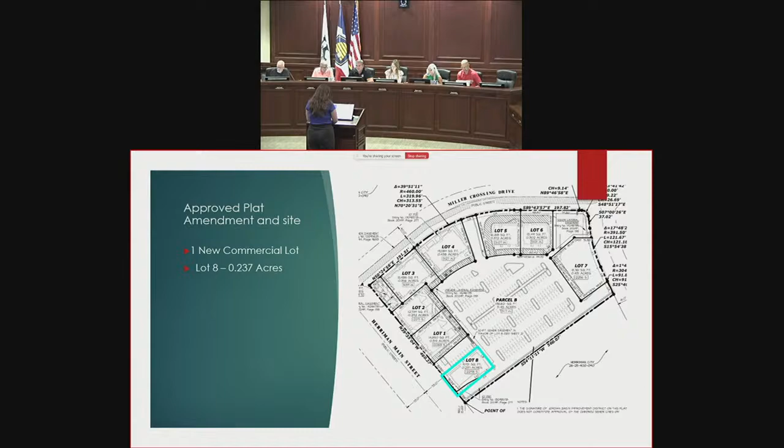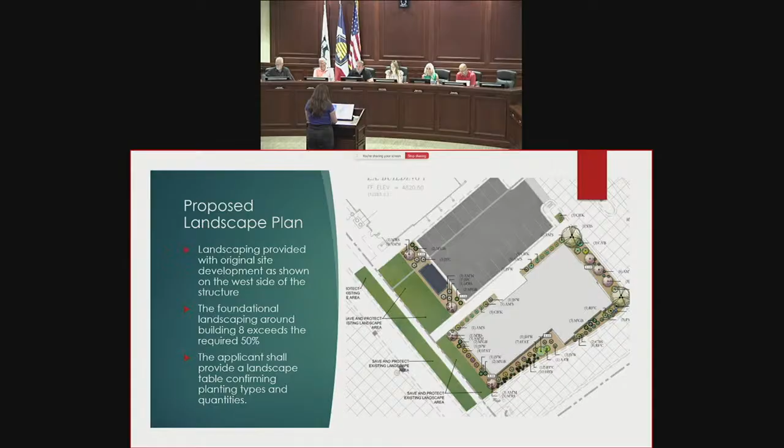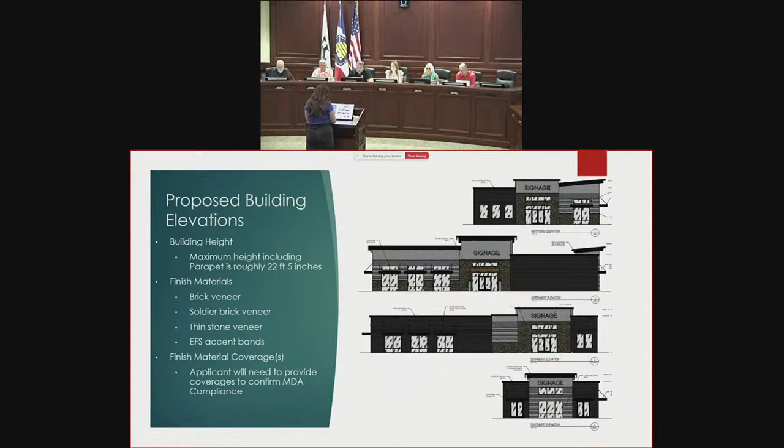These are the proposed elevations. As you can see, they're pretty similar to what else you would find in the Copperview Plaza. The maximum height shown on these drawings, including the parapets, is roughly 22 feet 5 inches. All of the materials mentioned are permitted to use within that MDA.

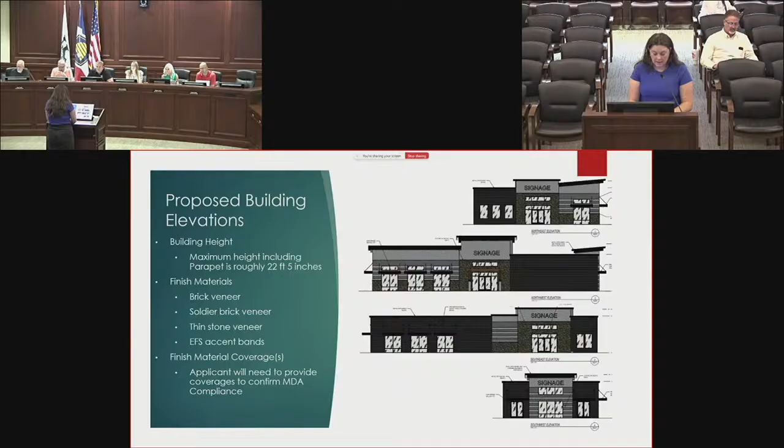Additionally, we will be asking the applicant for the final percentages. That was hard to say for some reason, the percentages. Removing the glazing and doors to make sure that they are meeting the 70-30 percentage that is mentioned within that MDA.

The parking for the area, that ratio was approved when the plat was amended as well as the MDA. There was a parking study done with that initial MDA. As this is still sort of that general retail recreation kind of area, it will require the same number of parking. So we are doing well there, and we're happy to see that there is a good amount of landscaping.

Finally, there are 7 conditions of approval. Please let me know if you have any questions about them.

Thank you. The applicant's not here, right? Okay. Do you have any questions for staff or a motion? No, this makes sense. It's what we expected. I'm ready to make a motion.

I move to approve item 4.1 with staff's 7 requirements. I'll second. A motion by Adam, a second by Heather. Andy? Yes. Daryl? Yes. Adam? Yes. Heather? Yes. And Preston? Yes. All right, that's approved.

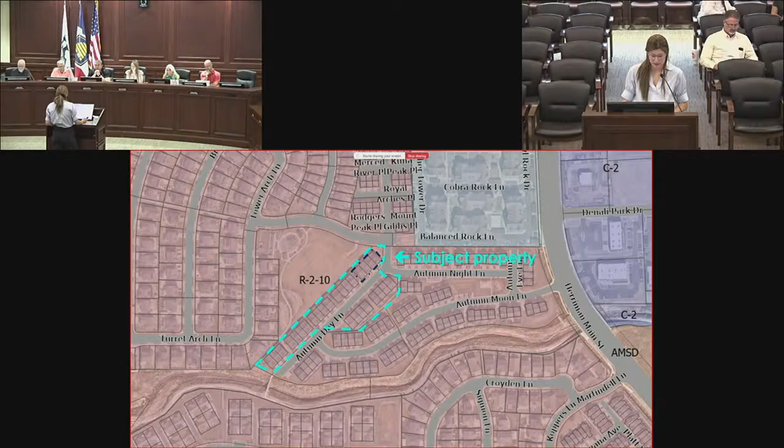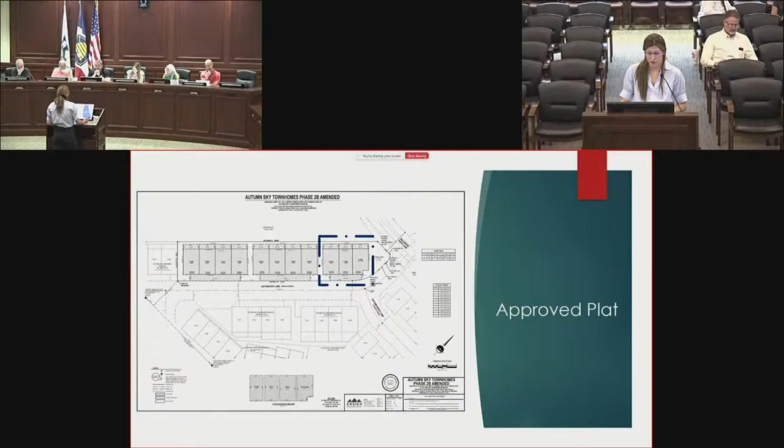Please note the navy dashed outline on the northern end of the property. This indicates and identifies building 26. And please also note that there are 4 units shown in this area. So the plat amendment previously approved reduces the units in building 26 from 4 units to 3 units as shown.

The original amended plat approval was actually given on June 6, 2024, with the following conditions of approval: that included receiving and agreeing to remaining corrections from city departments and to comply with all of the original conditions of preliminary subdivision approval, as well as to comply with all fire lane requirements per the UFA.

Just to keep in mind, a consideration of approval does come from section 10-5-15J of our adopted municipal code, addressing that with written request and good cause, the Planning Commission may grant up to a 1-year extension.

Staff recommends approval with the following condition: that all the existing conditions of approval for the original application request are completed, that they receive and agree to the remaining corrections from all of our city departments, including removing the abandoning drive approach from Half Dome Way, to also comply with all the fire lane requirements per the UFA, and if the subdivision plat is not recorded by June 6th of 2027, the preliminary approval will be deemed withdrawn.

Expire with no further force or effect. Let me know if you all have any questions.

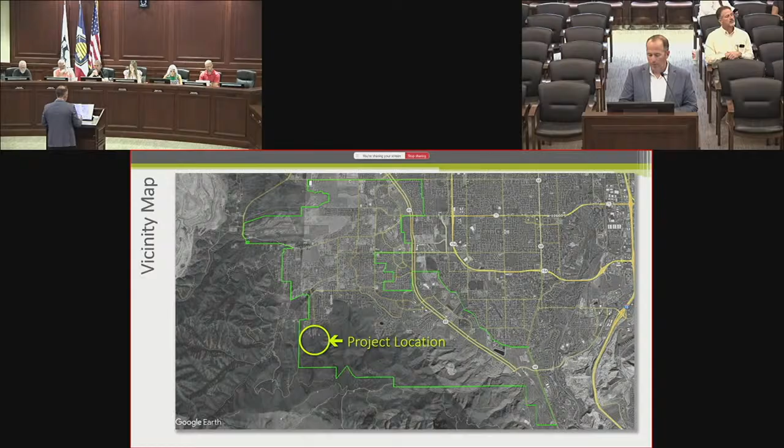Location of the Cove, for general public knowledge, is south end of town, kind of disconnected from most everything. This is the upper end of the Cove, and it's currently undeveloped on the far south end. This PUD was approved in 2004, with 423 total units approved at the time. Since 2004, they've built 201 units, leaving 222 remaining. We'll talk about that number again in a minute.

The key requirements were the approval granted by the Planning Commission at that time granted preliminary subdivision approval. All subdivisions since then have submitted an application, but they don't come to the Planning Commission. They're approved by staff unless the average grade of the lots or the site is over 20%. That was part of the original approval condition, so you'll see them if they're over 20%.

It also approved a concept plan and a PUD and a design booklet, which I attached in the packet. As you can imagine, in 2004, some of the requirements were quite a bit different for some of the items, so we'll go through that.

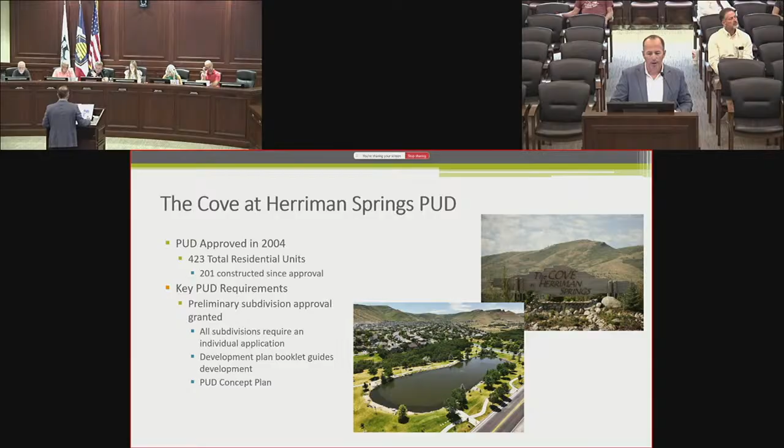The key requests are a modified cross-section for the roadway, some different lot configurations for the lot lines, some updated landscaping requirements, as I talked about in that design booklet. It required lush lawn and kind of extravagant landscaping, and we've kind of moved away from that with the drought and water-wise landscaping requirements. And then they're proposing some parking stalls near the open space to access the trails on the far south end of the project.

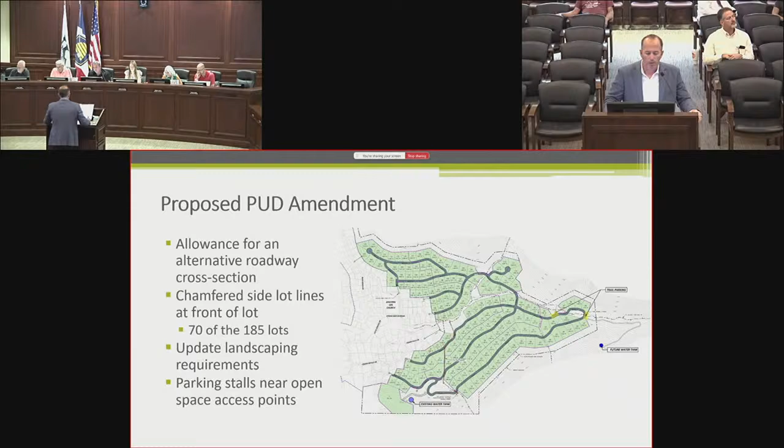Side-by-side comparison of what's approved and what's being requested is shown here. You can see there's fewer lots. Like I said earlier, there was 222 remaining lots. They're proposing, I think, 185 here. So fewer lots, fewer cul-de-sacs, so it's a little bit better connected.

You can see that all the roads basically tied in above the circle near the church. This is where the two maps line up. So the old plan, all the roads would tie in above the church property. On the new plan, some of the roads tie in and come out below the church, so it kind of disperses the traffic a bit more. They all still get on Spring Canyon to leave the Cove, but where they tie into Spring Canyon is a little bit different. There's a little bit more access to open space.

There's some more open areas, which allows for the parking that's being proposed. And then the original plan required an equestrian trailhead at the far south end. Since 2004, the city has built the Wide Hollow Trailhead, and we've learned from some other projects, Black Ridge specifically, that putting major trailheads or recreational features at the end of a residential development isn't always the best thing. It puts a lot of traffic and a lot of use right into the residential area. So it's being proposed to remove that equestrian trailhead, and it's been supported by staff to remove that requirement from here.

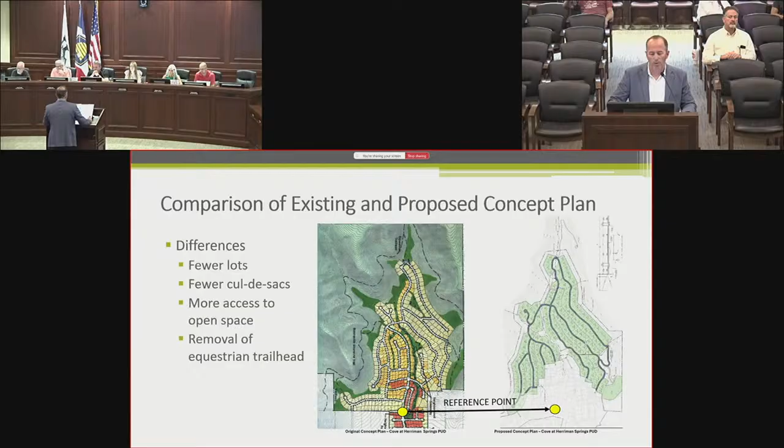A little bit more detail on the road cross-section. In 2006, there was an amendment to the PUD that approved the use of a 50-foot wide road cross-section in the Cove, for all of the Cove.

No roads have been built to 50 feet in the Cove. The narrowest up there is 53 feet, which is the city standard. The purpose for going to a narrower cross-section would be to minimize grading.

You can save a few feet on each road, and as I show in the next plan on the next sheet, you'll see you can save several feet in elevation and grading, minimizing the impact on the landscape grading the road. So some of the major differences between a typical 50-foot wide road cross-section and what's being proposed here...

...is the mountable curb. The park strips are taken away. That's because if the sidewalk was running with a high back curb right along it, you'd have to kick the sidewalk back at every driveway to meet ADA requirements. Otherwise it'd be too steep on the slopes to do the driveway cut in a high back.

There's a little bit wider travel lanes in the narrower cross-section, surprisingly. It goes to a 14-foot travel lane instead of 12.5. And the sidewalks are being proposed to be 6 feet instead of 5, so a little bit wider sidewalk.

In the proposed cross-section, there's a 2-foot easement for Herriman City specifically, for street lights, traffic signs, water meters, fire hydrants, things of that nature. So we were asking for a 3-foot easement on the back. With that 3-foot easement on each side, with the 44-foot right-of-way, that would essentially be the same right-of-way width as a 50-foot right-of-way, but it'd be an easement behind the sidewalk.

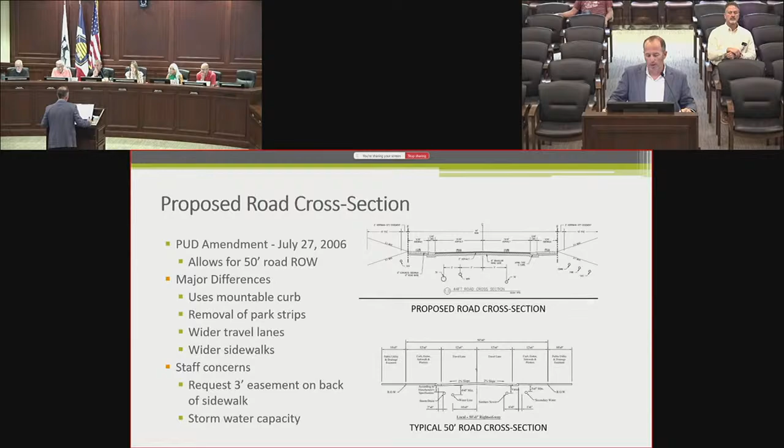This map shows where the engineering department recommends using this cross-section. There's a couple little segments of road where they didn't feel it was necessary, and that would be to continue the existing cross-section of Spring Canyon up to the first intersection, trying to keep the cross-sections where it would benefit the site grading the most, utilizing them in the steepest areas of this plan.

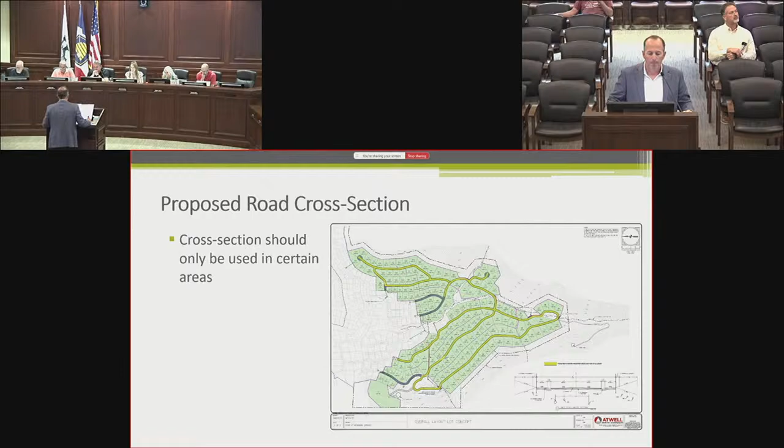So with that, staff recommendation is to approve the PUD amendment with the following conditions: that all the existing requirements remain in effect from the original PUD approval, update the booklet specifically for the sections on landscaping so that it follows our water-wise requirements and code, and approve the modified road cross-section in the areas designated on the map, doing a deviation to the standard application, which is reviewed by the Public Works Director, Community Development Director, myself, and the city engineer. All three review it to make sure it is maintainable and works for all engineering standards, and that the Public Works group can maintain it going forward.

And so with that, I'd be happy to answer any questions, and remember the applicant's here to answer any questions as well. Thank you. Do I have any questions for Blake? No, I don't. Okay, does the applicant have anything they'd like to add?

Thank you. Okay, discussion or a motion? I feel like we've seen this many times in the past, and I'm okay. I'm ready to make a motion. I'll make a motion that item 4.3 gain approval together with staff's recommendations 1, 2, 3, 4, 5, and the project move forward.

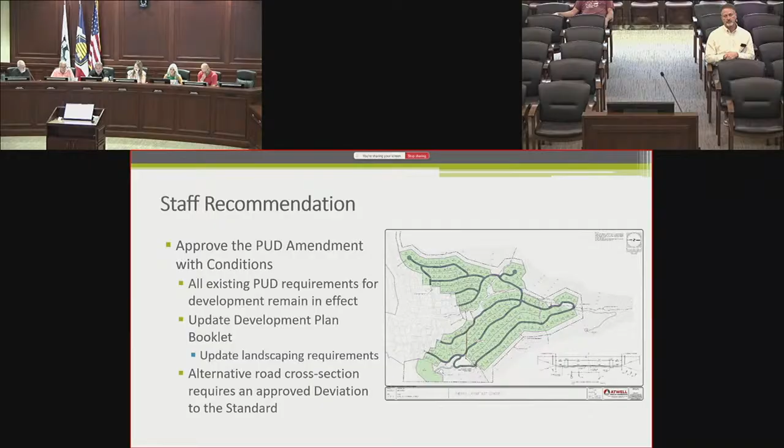I'll second that. So we have a motion by Daryl, a second by Adam. Andy? Yes. Daryl? Yes. Adam? Yes. Heather? Yes. And Preston? Yes. All right, so that passes. Thank you.

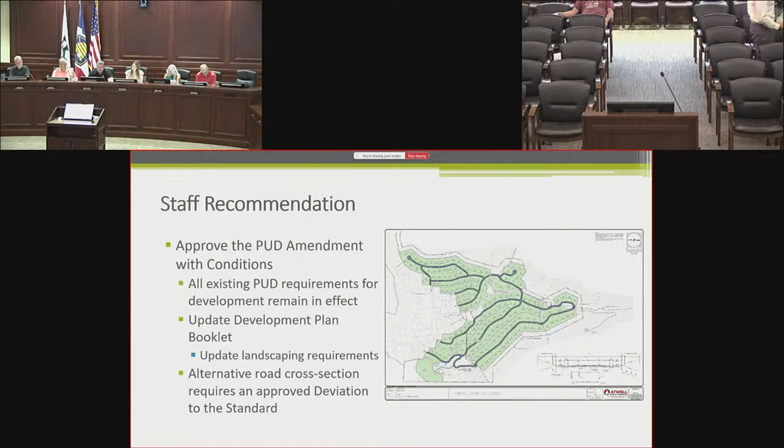Do we have the public hearing statement? Sorry, I don't have it memorized. It's right at the back. Is it in there? It's not in red, but it's the very last part of the packet. The last paragraph there. Let's see, I might have it in another... No, back, last page. Very last page. The very last... nope, one... you had it. Right there. Thank you.

Okay, public comment policy and procedure. The purpose of public comment is to allow citizens to address items on the agenda. Citizens requesting to address the commission will be asked to complete a written comment form and present it to the city recorder. In general, the chair will allow an individual 3 minutes, and a spokesperson recognized as representing a group may be allowed up to 5 minutes. This policy also applies to all public hearings.

All right, item 5.1: review and consider a request to recommend an amendment to the Herriman City zoning map from C1 to CF.

Item 5.1, review and consider a request to recommend an amendment to the Herriman City zoning map from C1 neighborhood commercial to CF commercial flex. On your screen is just the general location of the subject property, almost directly north of us.

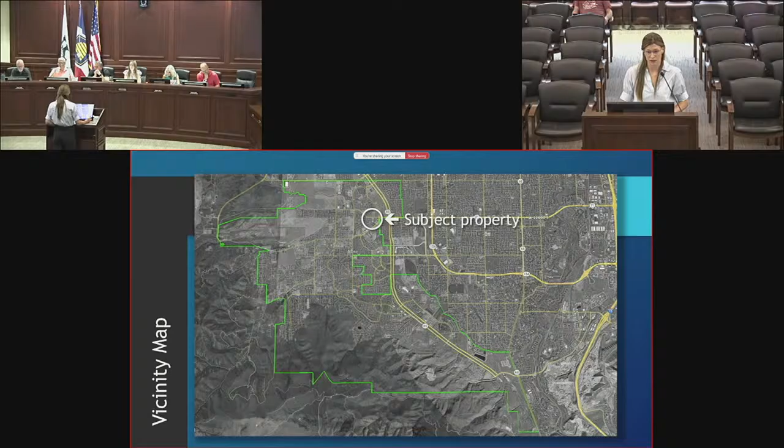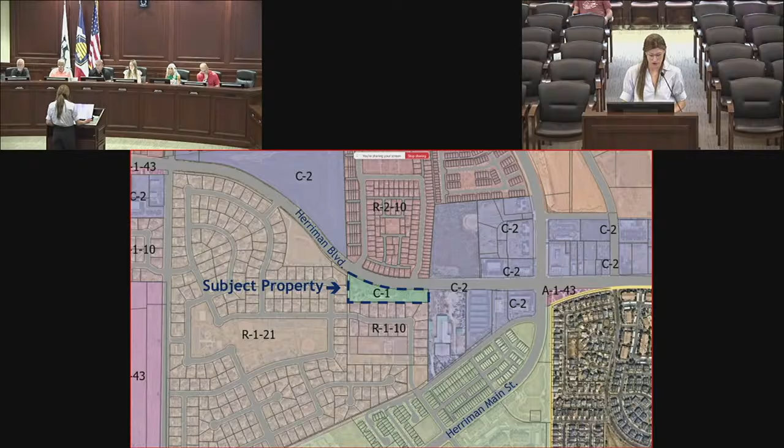The current zoning of the subject property is C1 commercial. Surrounding parcels vary from R121 to R110 to C2 found in adjacent parcels to the east.

The property is approximately 2.6 acres and is considered an unusual shaped lot. It is also located within the environmental contamination overlay zone, so cleanup does impose limitations on the subject property's site development feasibility. The use of the property may also impact the management practice required for site development.

The developer will be required to complete an environmental site assessment, an ESA. The ESA will be used to develop a soil management plan, which is a requirement for a land disturbance permit.

The applicant has requested to rezone the property from C1 to CF in order to develop the site with smaller commercial flex and assembly spaces that align with market needs. I would also like to highlight that both the C1 and CF have a 35-foot height limitation for the primary structure.

I did want to briefly discuss the intention of the C1 and the CF zones. The purpose of the C1 zone is to provide areas in the city for neighborhood commercial development. The CF zone, however, is intended to provide areas in the city with a variety of commercial uses, including warehousing, light manufacturing, entrepreneurship, reselling, and retail.

This zone is intended to encourage commercial development in areas that may have limitations, such as topography, access, irregular shapes, and visibility from major corridors.

This zone is intended to create areas in the city where home occupation businesses can transition into small commercial spaces. It's also intended to be an option for existing small businesses to expand in the city. It can also create maker spaces where businesses can collaborate with one another.

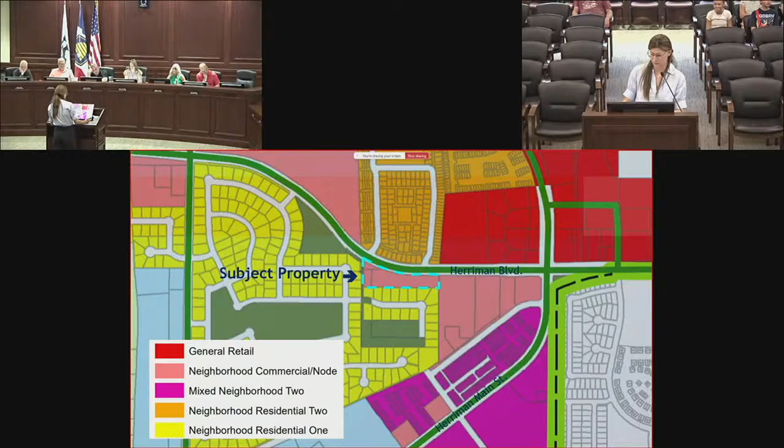Planning and zoning have no significant concerns with the rezone that would not be addressed during the required conditional use approval process for the subject property. The proposed rezone is compatible with the future land use map in the general plan and zoning code.

Engineering noted no concerns with facility or service deficiencies that would not be addressed during the typical conditional use approval process as well. Concerns with the soil contamination will also be addressed through the ESA and soil management plan that will be a required step in the process to even begin a land disturbance permit.

Considering these findings, staff recommends the Planning Commission forward a positive recommendation to the City Council to amend the Herriman City official zoning map for approximately 2.6 acres of property located at 5222 West Herriman Boulevard from C1 Commercial to the CF Commercial Flex as proposed by the applicant. Are there any questions that I can answer?

So I had a question on that soil management plan. What does that entail? The soil management plan depends on that ESA. The ESA that is first required is conducted, and then Blake, correct me if you have some additional information from engineering.

My understanding is that they will conduct the ESA, a certified engineer, I believe with that specialty, an environmental engineer, will actually then tell us what the soil management plan needs to be based on that ESA. Because we don't fully know the level of contamination on the site specifically, other than that it was identified in that overlay, in order to address it as it is site specific, that ESA will then be conducted, and then they'll make the soil management plan, and they will collaborate with the city.